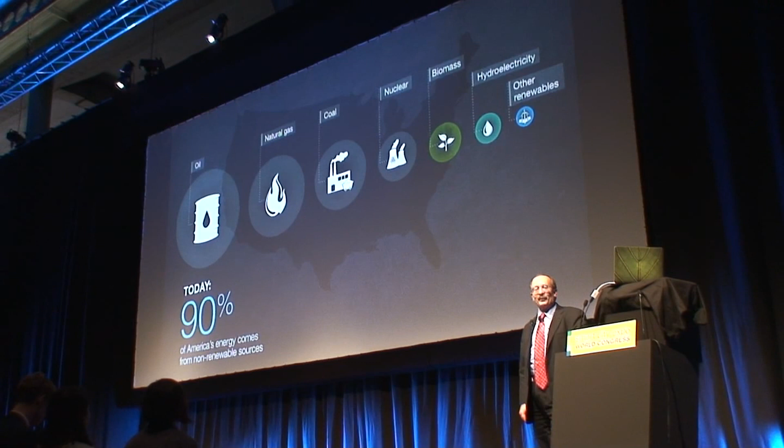4/5 of the world's energy still comes from burning each year 19 cubic kilometers of the rotted remains of primeval swamp goo. As a National Petroleum Council member, I should tell you, and it's true, that those fossil fuels have built our civilization and created our wealth and enriched the lives of billions of people. But their rising costs to our security, health, environment, economy are eroding, if not outweighing, their benefits. So we need a new fire.

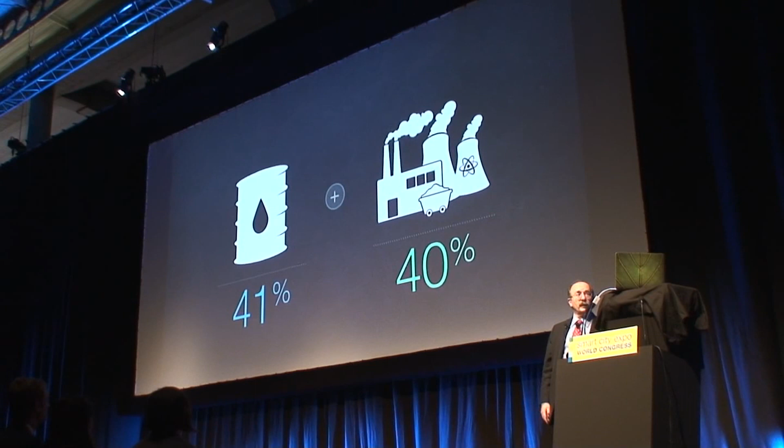And switching from the old fire to the new fire changes 2 big stories, oil and electricity, each of which puts 2/5 of the fossil carbon into the air. These are distinct stories. In my country, they're less than 1% linked, but the uses are similarly concentrated. 3/4 of U.S. oil fuels transportation, 3/4 of U.S. electricity powers buildings, the rest of both runs factories. So very efficient transport and land use and buildings and factories can save a lot of oil and coal and natural gas to displace both.

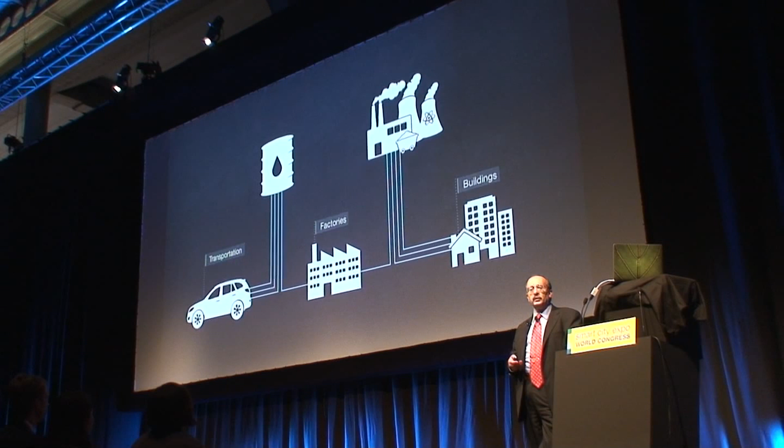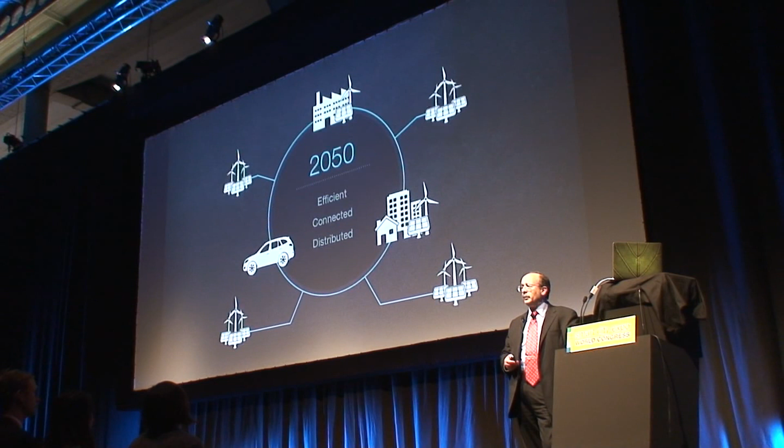But today's energy system is not only inefficient, it's also aging, dirty, insecure and disconnected, and it needs refurbishment. But by 2050, it could become efficient, connected, and distributed with elegantly frugal vehicles, buildings, and factories, all depending on a secure, modern, and resilient electricity system. So we can eliminate our addiction to oil and coal by 2050 and use 1/3 less natural gas while switching to 3-fold more efficient use and 3/4 renewable supplies.

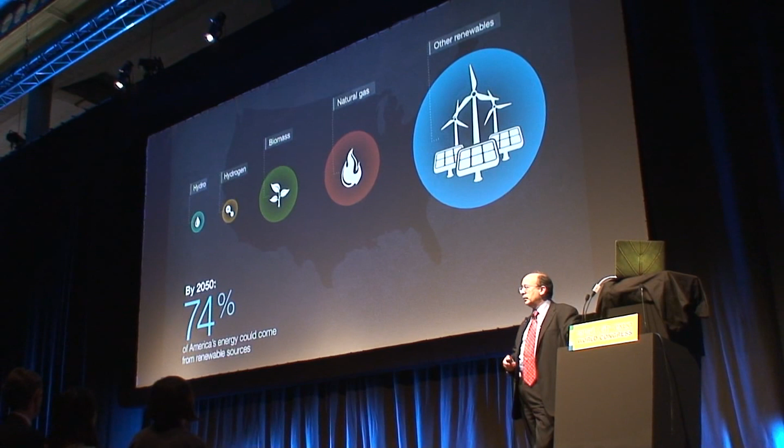That's the transition I'll describe for the United States, but I work in 50-odd countries, and I think you'll find that the U.S. solutions have considerable resonance, opportunity, adaptability to many other societies. Now, by 2050, we found that this transition in the United States could cost $5 trillion less in net present value than business as usual, counting all external or hidden costs at 0, a conservatively low estimate. And yet this cheaper energy system could support a 158% bigger economy, all without needing oil or coal, or for that matter, nuclear energy.

And this transition would need no new inventions and no acts of Congress, running around Washington gridlock, because instead it's led by business for profit. It uses our most effective institutions, private enterprise co-evolving with civil society, sped by military innovation, to go around our least effective institutions. And whether you care most about profits and jobs and competitive advantage, or about national security, or about environmental stewardship, creation care, public health, climate protection, strong communities, reinventing fire makes sense and makes money.

Now, General Eisenhower reputedly said that expanding the boundaries of a tough problem makes it soluble by encompassing more options and more synergies, including what the solution requires. So in Reinventing Fire, we integrated all 4 sectors that use energy: transport, buildings, industry, and electricity. And we integrated 4 kinds of innovation, not just the usual 2, technology and public policy, but also 2 even more powerful ones normally left out, namely design, the way we combine technologies, and strategy, new business models, new competitive strategies. And these combinations give much more than the sum of their parts, especially in creating some deeply disruptive business opportunities.

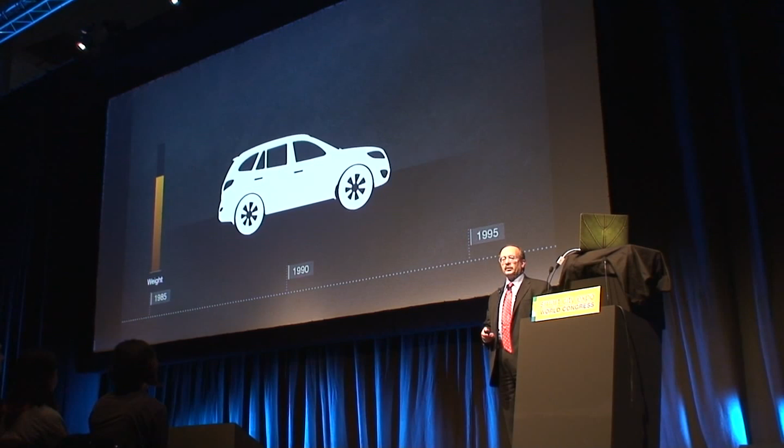But for the past quarter century, epidemic obesity has made our 2-ton steel autos gain weight twice as fast as we have. Happily, today we have ultralight, ultra-strong materials like carbon fiber composites that can make dramatic weight savings snowball and can make autos simpler and cheaper to build, as I'll explain.

Lighter, more slippery autos need less force to move them, so their engine gets smaller. Then you can afford to electrify them, because you need about 3 times fewer of the costly fuel cells or batteries. So they get smaller, lighter, and cheaper, and the price of the car converges toward today's value, while the driving cost per kilometer gets much smaller.

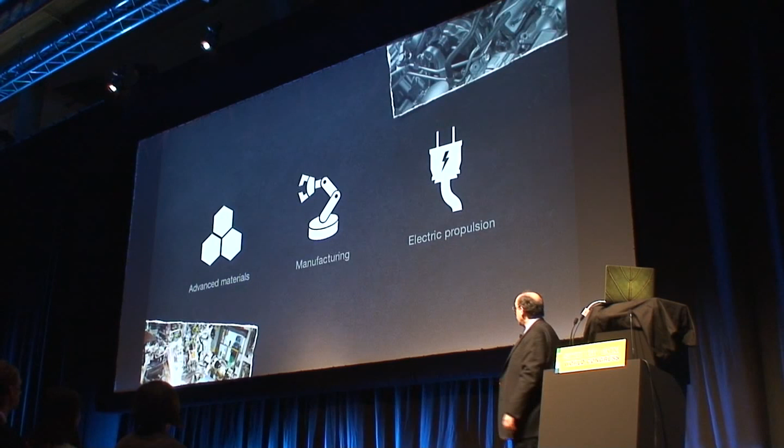That specific sequence of innovations can transform automakers from wringing tiny savings out of essentially Victorian steel stamping and engine technologies, to the steeply falling costs of 3 mutually reinforcing technologies: the ultralight materials, their manufacturing techniques, and electric propulsion.

If you are exploiting 3 steep and synergistic learning curves while your competitor is out on the flat part of one learning curve, you win. This also turns out to de-risk the auto business very substantially.

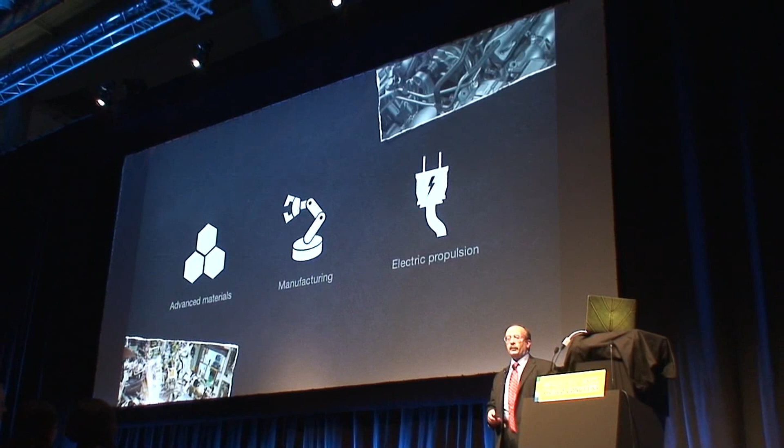Now, sales of ultralight electric autos can grow faster and their costs can drop faster with a public policy called feebates — temporarily, though, that means rebates for efficient new autos paid for by fees on inefficient ones. In its first 2 years, the biggest of 5 European feebate or bonus-malus systems tripled the speed of improving auto efficiency. That was in France.

The resulting shift to electric autos is going to be as game-changing as shifting from small refinements in typewriters to the dramatic Moore's Law-driven gains in computers. Of course, IT is now our biggest industry. Typewriter makers have vanished.

So vehicle fitness, taking the obesity out of the car, opens up a powerful new automotive competitive strategy that doubles the expected oil savings in 40 years, but also makes affordable the electrification that can save the rest of the oil.

Many different countries could lead this next automotive revolution. The formidable barriers are much more cultural than they are technological or economic, and we're helping both the automakers and the supply chain to tackle them. The current leader is Germany.

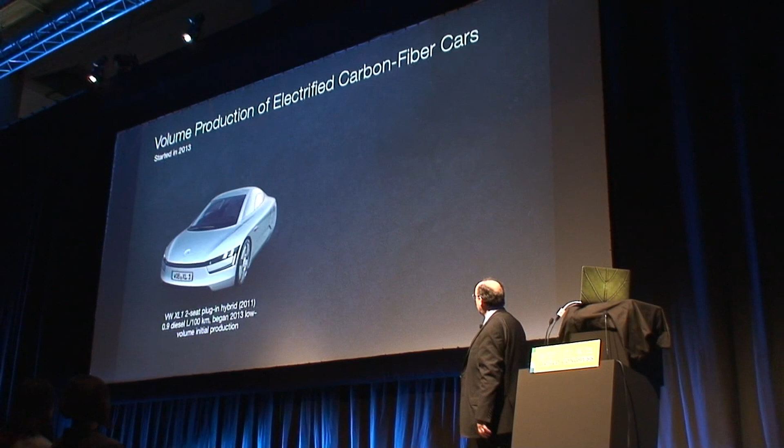This year, Volkswagen began ramping up low-volume production of this 2-seat carbon fiber plug-in hybrid, getting 0.9 diesel liters per 100 kilometers. And BMW began ramping mid-volume production of this carbon fiber battery electric car.

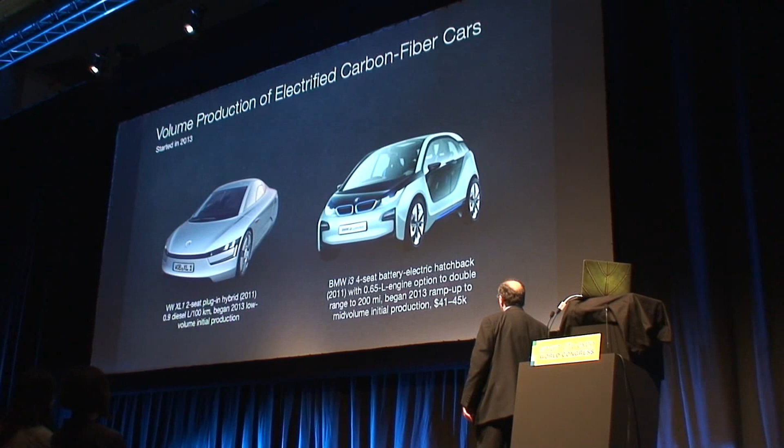They said its carbon fiber is paid for by needing fewer batteries, and their CEO said we do not intend to be a typewriter maker, because he can look across München to where Olympia used to make excellent typewriters.

Audi recently showed a carbon fiber plug-in hybrid concept vehicle rated like this one at 0.9 liters per 100 kilometers, but it's an SUV.

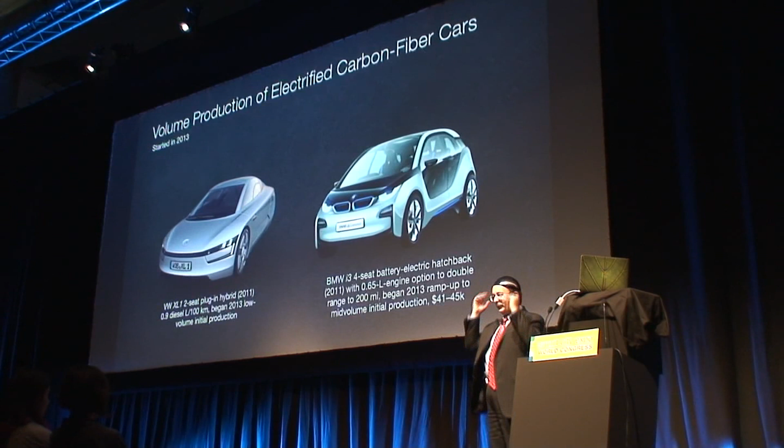Now, 7 years ago, an even faster and cheaper technology developed by one of our spin-offs made this carbon cap in less than 1 minute. And if I hit it, you can tell it's extremely strong and stiff.

Rings like a bell. So it's stronger and stiffer than steel, a third the weight, tougher than titanium. Tom Friedman, the journalist, hit it as hard as he could with a sledgehammer and couldn't even make a mark on it. So don't worry about dropping it.

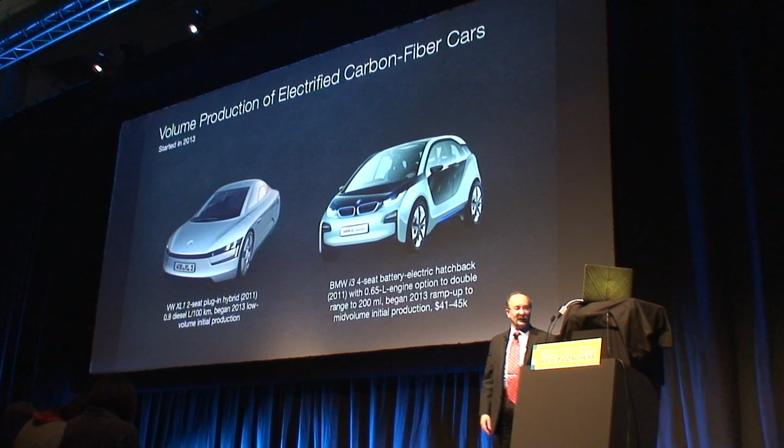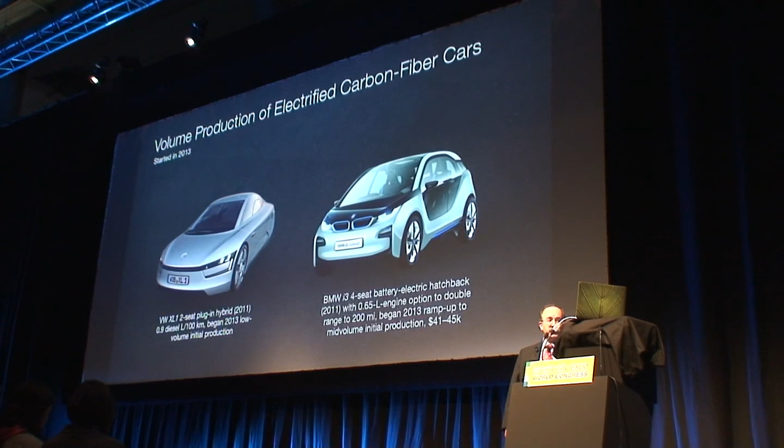I brought along another piece that was recently made that's induction welded. And it's now possible to make a 2x2 meter complex part with such techniques in 1 minute. Such techniques, which are available now in various forms from 17 firms, can scale to automotive cost and speed with essentially aerospace performance.

Adoption could save 4/5 of the capital needed for automaking and could save a lot of lives, because these materials can absorb 6 to 12 times as much crash energy as steel per kilo.

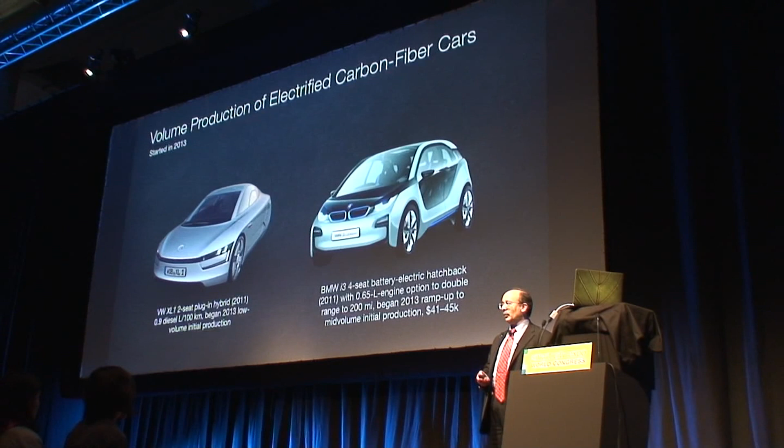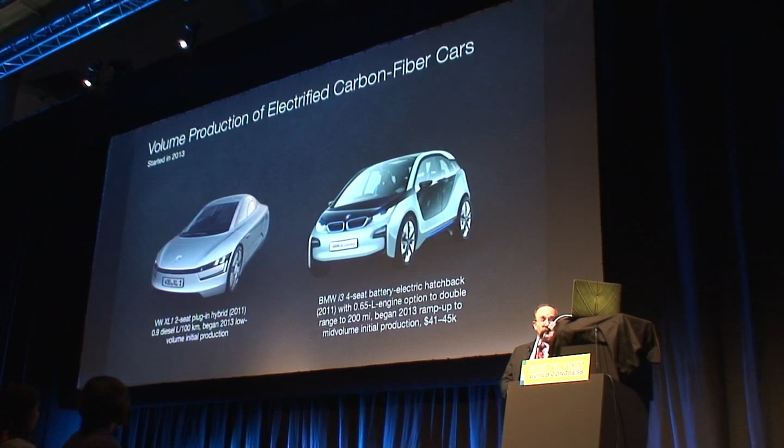They could save oil equivalent in the US alone to 1.5 Saudis or half an OPEC that we would find by drilling in a very prospective play called the Detroit Formation. There's a lot of negabarrels down there, and they cost $18 a barrel because it's just to pay for the electrification. The ultralighting is essentially free, paid for by simpler automaking and a much smaller powertrain.

And of course, the negabarrels are domestic, secure, carbon-free, and inexhaustible. The lightest announced carbon fiber family car is this plug-in hybrid concept car that Toyota showed 6 years ago. It has the interior volume of a Prius, half the fuel use, 1/3 the weight, 420 kilograms. And that, I think, is a sign of things to come.

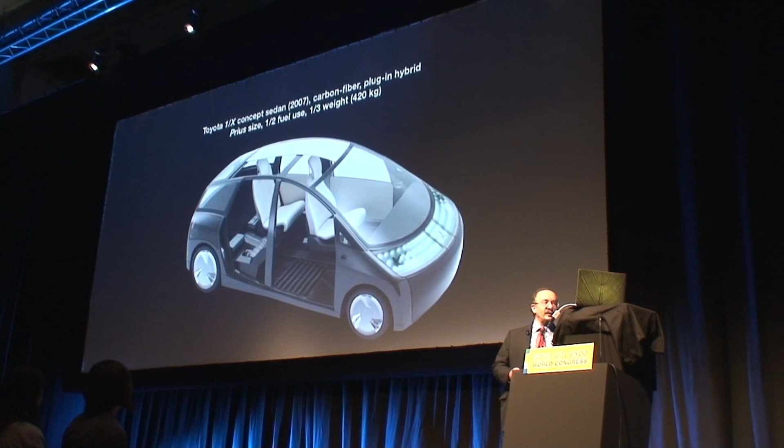Now, the same physics and the same business logic apply also to heavy vehicles. Walmart last year used 44% less fuel than in 2005 to move a case in its giant fleet of heavy trucks. And the full technological potential to improve the Class 8 trucks is a tripling of efficiency. If you combine that with the triple to quintupled efficiency airplanes being designed at places like Boeing, NASA, and MIT, then the U.S. would save nearly $1 trillion worth of fuel on the heavy vehicles.

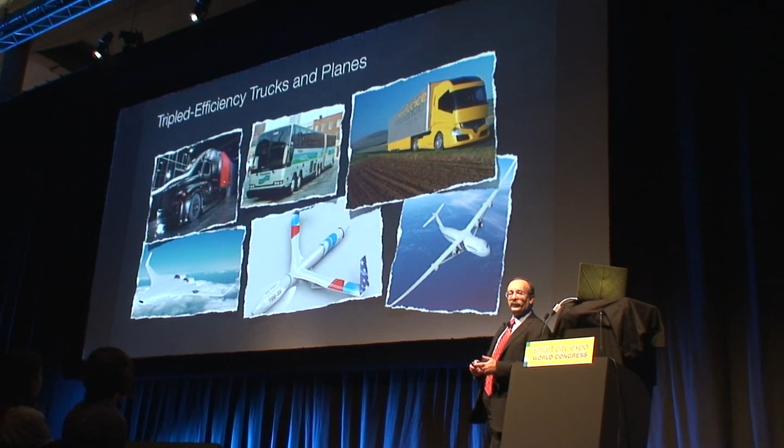And in both light and heavy vehicles, these technical revolutions in efficiency are being driven by the military revolution in efficiency. It's going to make that faster, much as military R&D already gave us the internet, the global positioning system, the jet engine industry, the microchip industry. Only this time it will be leveraging oil savings in the civilian sector, which uses over 50 times as much oil, and that will help get big oil-guzzling countries like mine off oil much faster, so that we needn't fight over the oil, and then our warfighters can have negamissions in the Persian Gulf, mission unnecessary. They really like that idea.

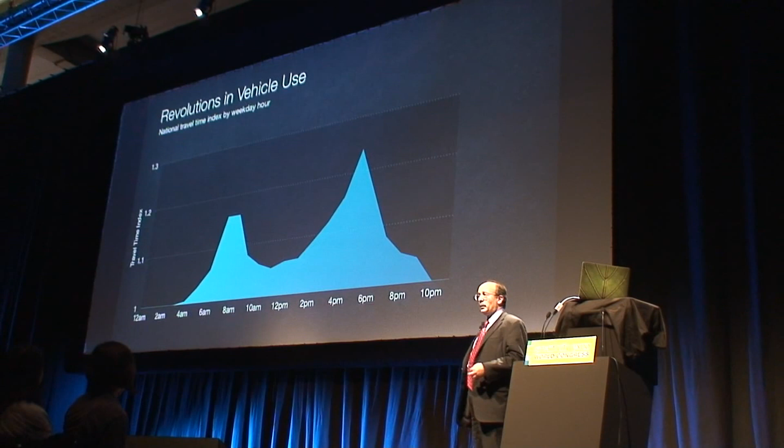Now, as we design and build vehicles better, we can also use them a lot smarter. This is a graph of U.S. traffic congestion with the morning and evening rush hours. And if that were an electricity load shape, we would be using a lot of IT-enabled pricing and smart grid and demand response to try to flatten those peaks. But by not yet doing this for road traffic, we are wasting many billions of dollars a year in idle people, idle vehicles, and idle roads.

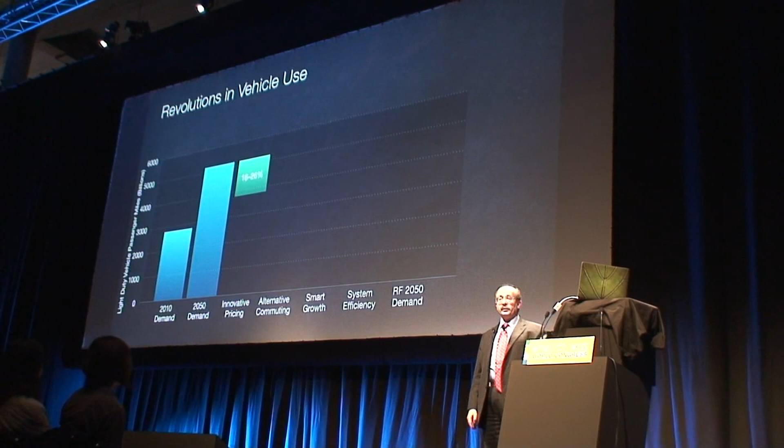But instead of just standing back and watching driving double as officially forecast, we could eliminate needless driving by combining 4 very powerful techniques. Namely, we can charge real-time driving costs per kilometer, not per liter. We can use smart IT to enhance public transport and empower car sharing, ride sharing, and smart parking. We can allow lucrative smart growth real estate models that help people be already where they want to be so they don't need to go somewhere else. That's more profitable for the developer, and we can also use IT to make traffic free flowing.

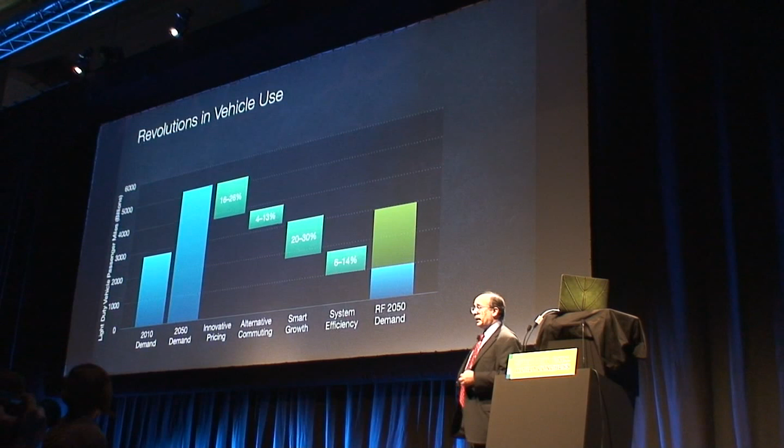So by combining those proven methods, the U.S. could get the same access and mobility, or better, with 46 to 84% less driving, saving another $0.3 trillion, plus another $0.3 trillion from smarter use of trucks. So 40 years from now, a much more mobile U.S. economy could be using no oil, and saving or displacing each barrel for $25 a barrel rather than buying it for way over $100 a barrel saves $4 trillion net present value, or if we counted just the hidden economic and military costs of U.S. oil dependence, that would be $12 trillion. And that still doesn't count any costs to health, safety, environment, climate, global stability and development, or our nation's independence and reputation.

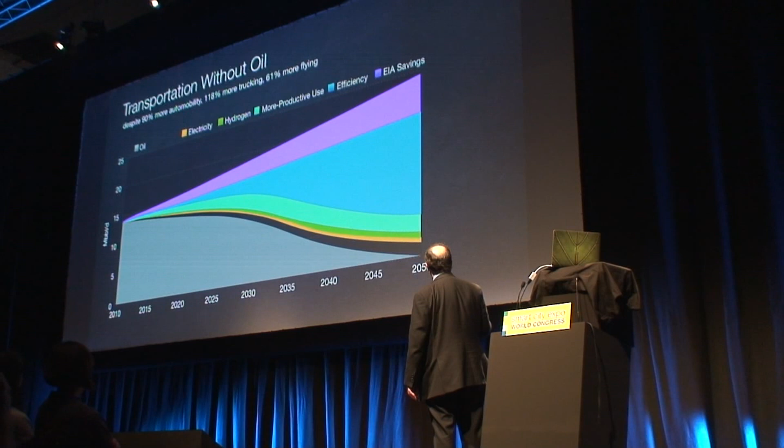So to get mobility without oil, to phase out the oil, we can first get efficient, adding to the government forecast savings, the new ones from vehicle fitness and more productive use of vehicles. And then those 1 or 2 liter per 100 kilometer autos can run on any mixture of hydrogen, electricity, and advanced biofuel. The heavy trucks and airplanes could realistically run on advanced biofuel or hydrogen, or the trucks could run on natural gas, but none of them will need oil. And the needed biofuels, if any, are such a small number they could be made 2/3 from waste and without needing any cropland or harming soil or climate.

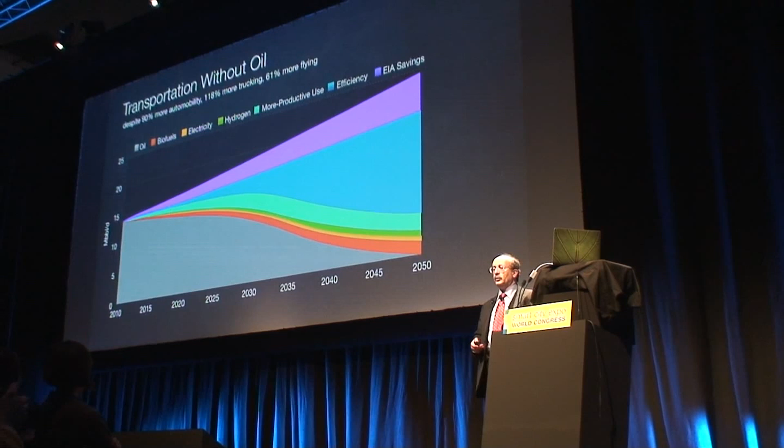So our little team speeds these oil savings by what we call institutional acupuncture. If the business logic is congested and not flowing properly, we insert little needles into selected points in partners like Ford, Walmart, and the Pentagon to get that chi, that entrepreneurial juice, flowing properly.

This long transition is well enough underway that even 4 years ago, some analysts were starting to see peak oil, not in supply, but in demand. Because as happened to whale oil in the 1850s, oil is becoming uncompetitive even at low prices before it becomes unavailable even at high prices.

But the electric autos that help that happen need not add new burdens to the electricity system. Rather, when smart autos exchange electricity and information through smart buildings with smart grids, they add to the grid flexibility and storage that help it accept varying solar and wind power. So it becomes easier to solve the auto and electricity problems together than separately.

And the electric autos also converge the oil story with our second big story: saving electricity and then making it differently.

These twin revolutions in electricity promise more numerous, diverse, and profound disruptions than in any other sector, because we've got 21st century technology and speed colliding head-on with 20th and even 19th century institutions, rules, and cultures.

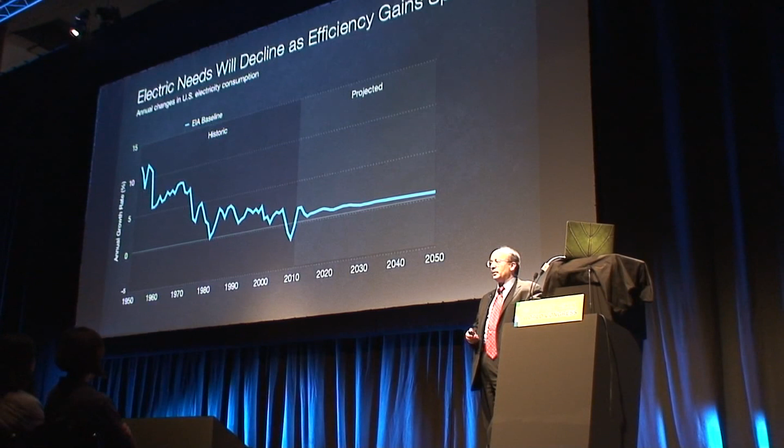Now, changing how we make electricity gets easier if we need less of it. Today, most of it is wasted, and the technologies for saving it keep improving faster than we can install them. So the unbought reserves of negawatts, saved watts, keep getting bigger and cheaper.

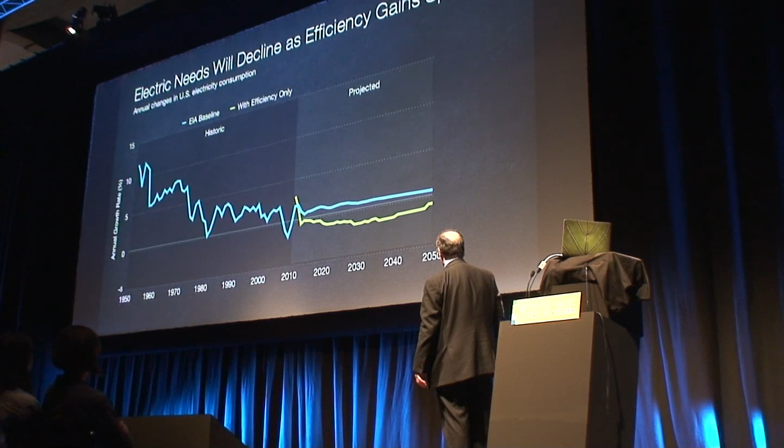But as buildings and industry start to catch up and get efficient faster than they grow, the demand for, say, U.S. electricity, instead of growing 1% a year as officially forecast, could shrink 1% a year, even after allowing for the extra use from those efficient electric cars.

And something like this, only more so, seems to be already happening, because last year alone in the United States, the weather-adjusted electricity used to make $1 of real GDP fell by 3.4% in one year. Unprecedented. But we can keep demand dropping by reasonably accelerating existing trends.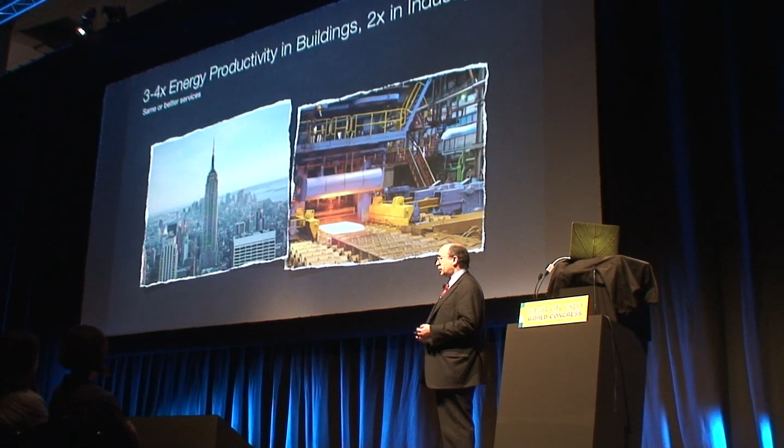Over the next 40 years, U.S. buildings, which I'll remind you use three-quarters of our electricity, could triple or quadruple their energy productivity, saving $1.4 trillion net present value with a 33% internal rate of return. The savings are worth 4 times their costs. And industry can also accelerate and double its energy productivity with a 21% internal rate of return.

So to do those things by 2050, we would just need, by 2030, to ramp up the national average levels of efficiency adoption to what our Pacific Northwest states already achieved 8 years ago.

There is a disruptive innovation we call integrative design that can do even better, because it often makes very large energy savings cost less than small or no savings, turning diminishing returns into expanding returns.

That's how our retrofit 3 years ago is saving two-fifths of the energy in the Empire State Building. We started off by remanufacturing all 6,500 windows on a temporary 5th floor window factory into super windows that are 3 times more insulating and let light come through but block heat.

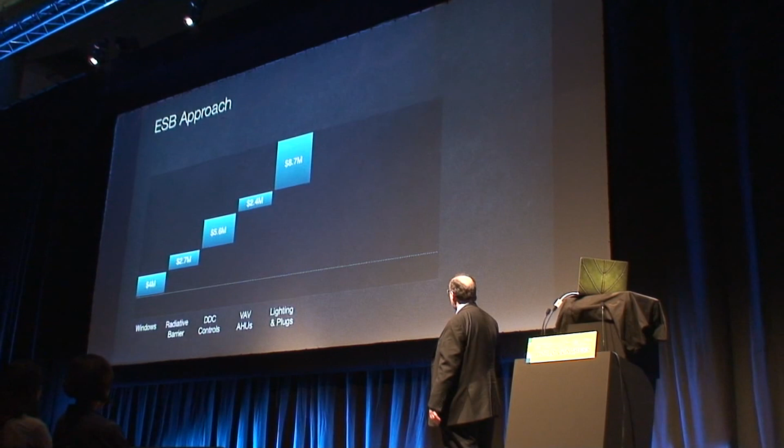Those, plus other improvements, reduced the maximum cooling load by one-third, and that made us able to save enough capital to pay for most of these improvements by renovating smaller chillers rather than adding bigger chillers. That capital saving reduced the payback time to just 3 years.

By the way, a major energy service company had also offered a 3-year payback, but their savings would be 6 times smaller, because they did disintegrated design, optimizing components separately, while we optimized the whole building as a system.

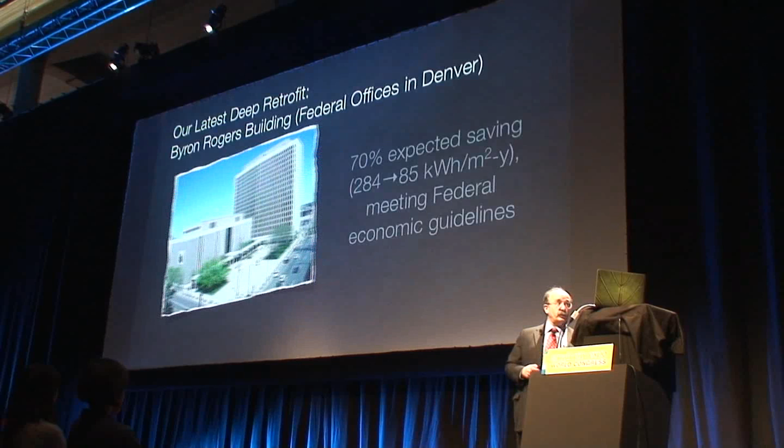We've just finished the cost-effective retrofit of a difficult 48-year-old federal office building, which is expected to cut energy use by 70%, making it probably more efficient than the most efficient new U.S. office building. That's how fast the state-of-the-art is moving.

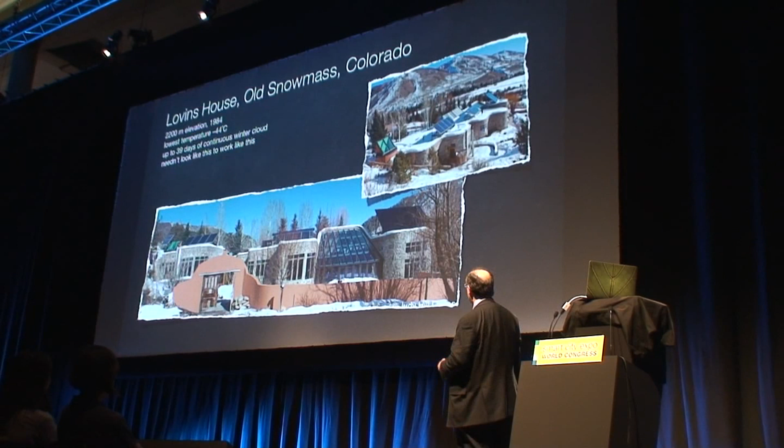Now let's look at a different sort of building. My wife Judy and I live in this house at 2,200 meters elevation near Aspen, Colorado, high in the Rocky Mountains, where the lowest temperature could be as low as minus 44 Celsius. And we've had up to 39 days of continuous cloud in midwinter.

This is actually an archetype that helped inspire the 30,000 or more European passive buildings, which, like ours, have and need no heating system, but have roughly normal construction cost. And they can look like whatever you want. They don't need to look like this to work like this.

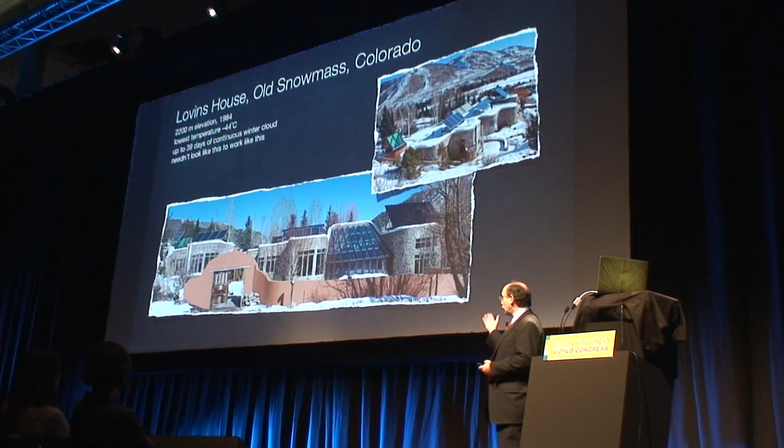Now, let's come into this central atrium, under the special glass which insulates like 14 sheets of glass. This is what the middle of the house looked like in a February snowstorm two years ago. You can see two of the five banana crops that were then ripening with no heating system. In fact, here's our new banana crop number 48, and here's numbers 46 and 47 - passive solar banana crops. These actually weighed 30 kilos and harvested themselves in March or so by pulling down the tree.

Now, when I moved into this house in 1984, it was saving about 99% of the usual space and water heating energy, about 90% of the household electricity, and about half the water. And it was all paying for itself in the first 10 months.

That was using 1983 technology. Well, today's is a lot better, so we've now retrofitted it and we're measuring about 300 data streams to see how much better. The trouble is that the measuring equipment seems to be using more electricity than the lights and appliances we're measuring.

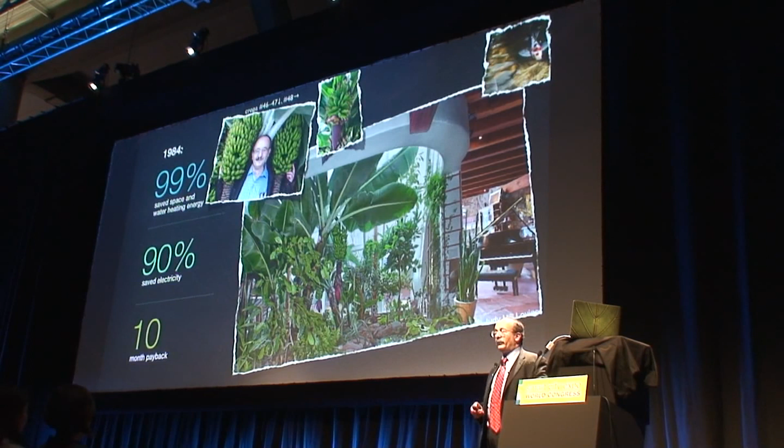A similar design has been used to eliminate air conditioning up to 46 Celsius - not a limit - with better comfort and lower construction cost. It's been used in steamy Bangkok to save about 90% of the air conditioning energy with normal construction cost and lower and better comfort. So probably almost everyone in the world lives in a climate somewhere between Bangkok and this place in Colorado. But wherever you are, the key is to get multiple benefits from single expenditures.

So this white arch holding up the middle of our house has 12 different functions, but only one cost.

Integrative design can also increase the $500 billion of conventional energy savings in U.S. industry. Dow has already captured $9 billion of energy savings on a $1 billion investment. But there's much more to do.

For example, three-fifths of the world's electricity runs motors, half of that runs pumps and fans, and we can make motors, pumps, and fans much better. But first we should capture bigger and cheaper savings that are normally ignored and are not yet in any of the engineering textbooks. For example, the biggest user of motor power is pumping - moving liquids through pipes.

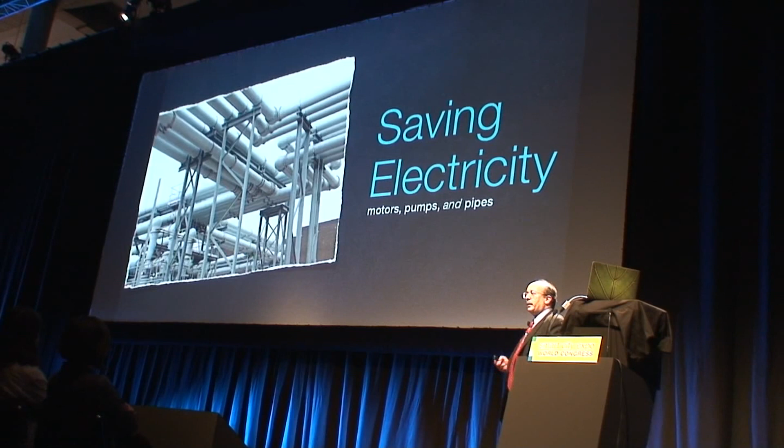But a standard industrial pumping loop was redesigned by a Dutch colleague to use at least 86% less pumping energy, not by improving the pumps and motors and controls, but just by replacing long, thin, crooked pipes with fat, short, straight pipes. And in the process, the pumping equipment gets smaller and the total capital cost goes down.

Actually, we did something like this in some new piping in our own house and saved 99% or so of the pumping energy at lower cost. So this is not new technology. This is just rearranging our metal furniture as designers, rediscovering Victorian engineering.

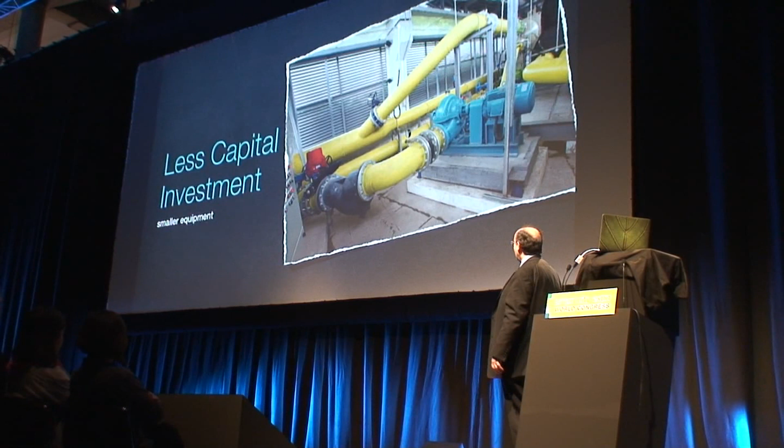And what does this mean for the electricity that's three-fifths used in motors? Well, if you put 100 units of, say, coal into the power plant, there are so many compounding losses that only one-tenth of that energy comes out the pipe as flow.

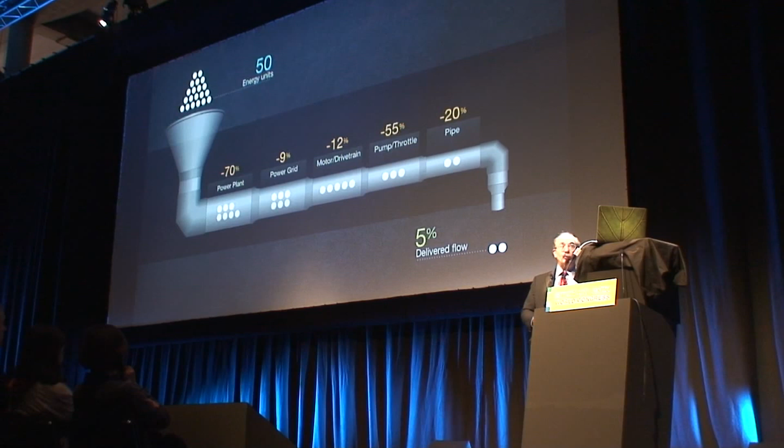But now we can turn those compounding losses around backwards from right to left, and they become compounding savings. When we save one unit of flow or friction in the pipe, it compounds back again to save 10 units of fuel and cost and pollution back at the power station, as well as what Hunter Lovins calls global weirding, and at the same time the components, as you go upstream, get smaller and cheaper.

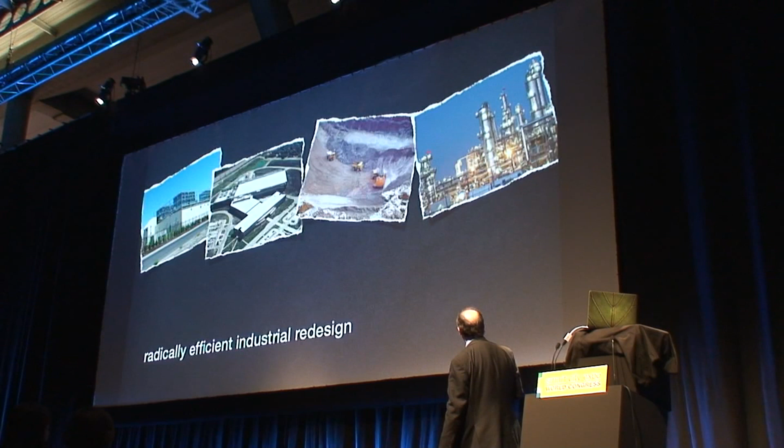Now, our team has lately found such snowballing energy savings in over $40 million worth of diverse industrial redesigns, from a Hewlett-Packard data center and Texas Instruments chip fab to Rio Tinto and Anglo-American mines and Shell hydrocarbon facilities and many others. Typically our retrofit designs can save about 30 to 60% of the energy with a 2 or 3 year payback, and our new facility designs save a bit more, say 40 to 90%, but almost always at lower capital cost.

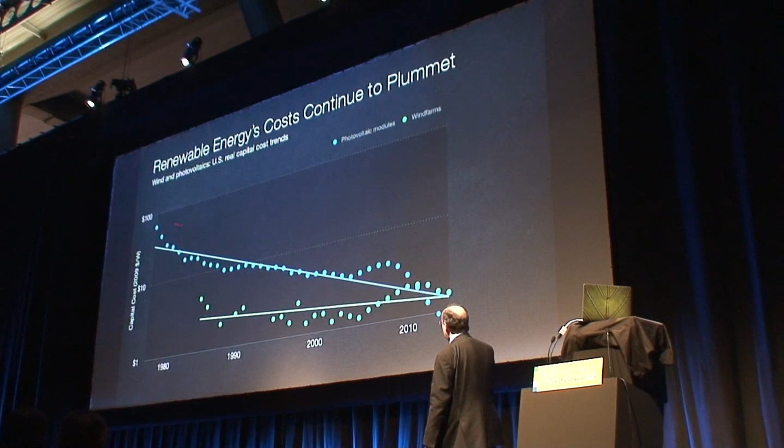Of course, needing less electricity would ease and speed the shift to new sources of electricity, especially modern renewables. China is leading their explosive growth and their plummeting costs, shown here on a logarithmic scale for solar photovoltaic modules, which have fallen off the bottom of the chart, and for wind farms.

And these technologies, when put in good sites, now actually outcompete even the supposedly cheap frack gas in the United States. So they're marketplace winners, and that's even though they're generally subsidized less than non-renewables are.

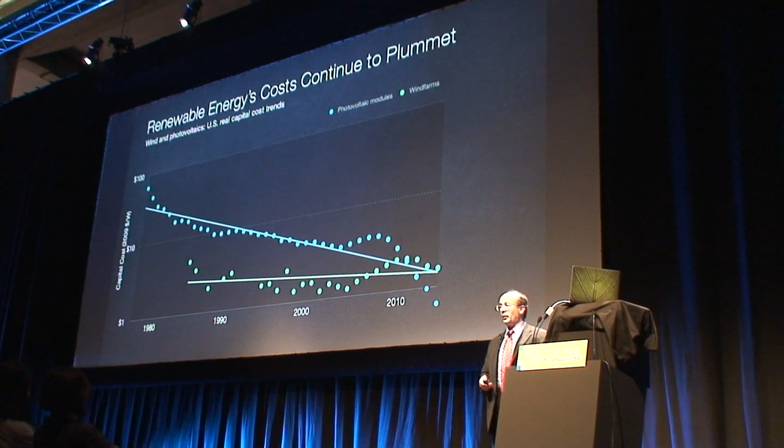In Germany, the installed solar power systems cost only half what they cost in the United States. We all buy the same equipment, but the German installers are much more efficient.

And therefore, today, even at twice the German price, remarkably, in at least 20 of the United States, entrepreneurs can come to your house and put solar power on your roof with no down payment and beat your electric bill. Soon the no down payment, no money down, will turn into cash back as the costs continue to fall.

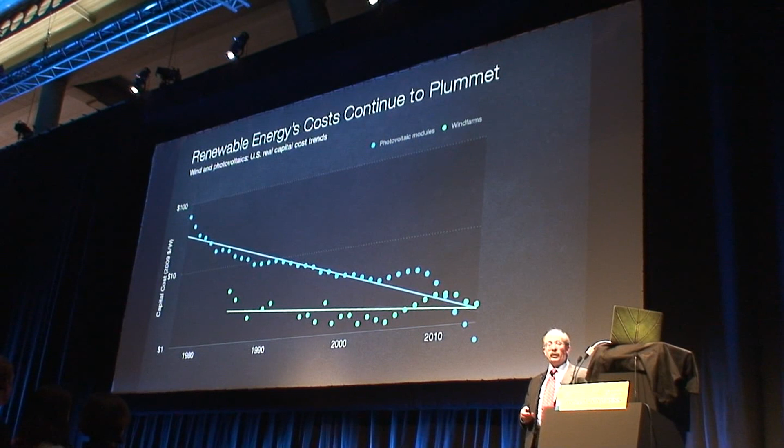And such unregulated products could ultimately add up to a virtual utility that could bypass the electric company, just as wireless phones bypass the wireline telephone companies. This gives electricity executives nightmares and venture capitalists sweet dreams.

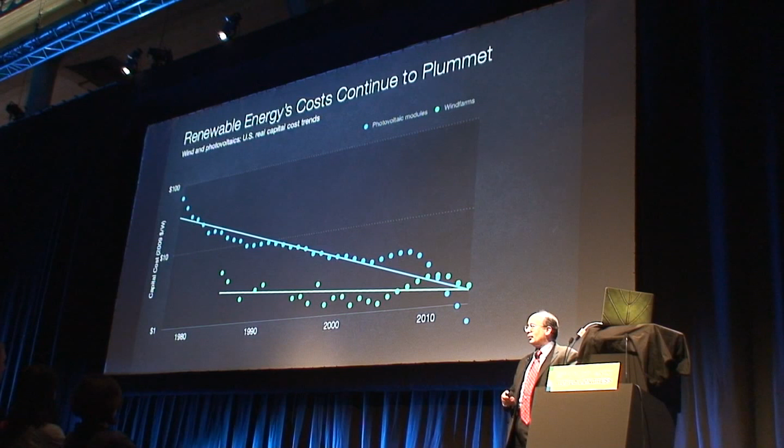Or the incumbent electricity providers could turn the insurgency into a major business opportunity, and we're working with both sides to do that. In fact, our institute has convened an E-Lab, or Electricity Innovation Lab, with 40-odd industry leaders to figure out the new business and revenue and regulatory models, grid integration, grid security, all the key elements of the next electricity industry.

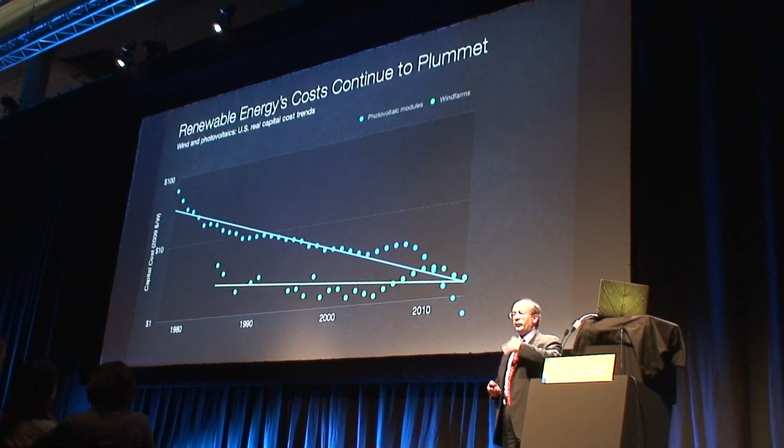For example, we've helped a little Colorado utility devise a bidirectional value tariff where the utility and the customers pay each other the fair value of the services they exchange, thus solving the unscalability of net metering.

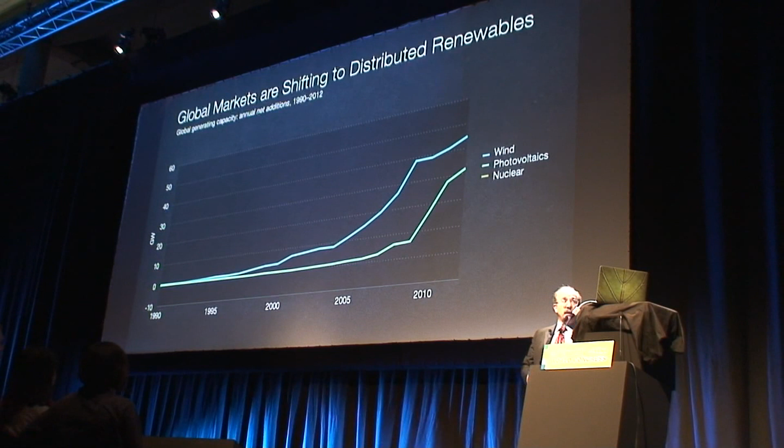Now here's the big picture. Worldwide, starting in 2008, half the world's added electric capacity each year has been renewable. And this graph shows the amount of wind and photovoltaic capacity added each year. Probably this year solar will cross over wind.

And these are very large numbers because electricity production has become a scalable, mass-produced, manufactured product, much more like microchips and computers than like building cathedrals.

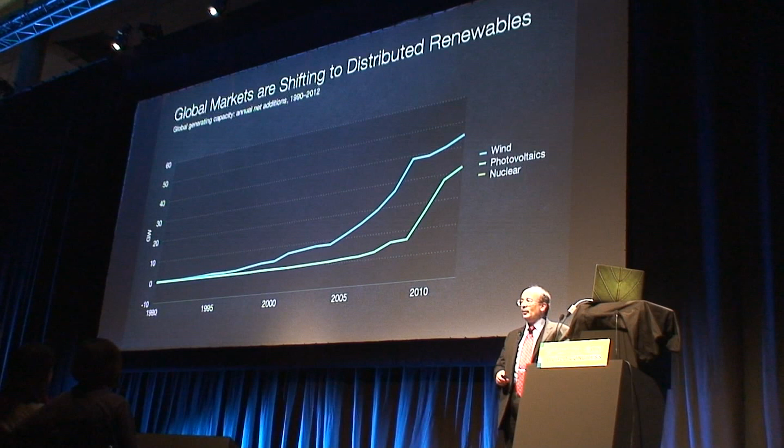We used to think you had to take 10 years and billions of dollars to build a power station. But now in those 10 years, you can build each year a photovoltaic factory, which each year thereafter will produce enough solar cells that each year that one factory's production for 1 year worth of solar cells will produce as much electricity as your big power plant would have produced.

So that's why solar cells are scaling faster than cell phones. The capacity to make them is now about 75 billion watts a year, twice the installation rate, although it's going to catch up quickly thanks to China.

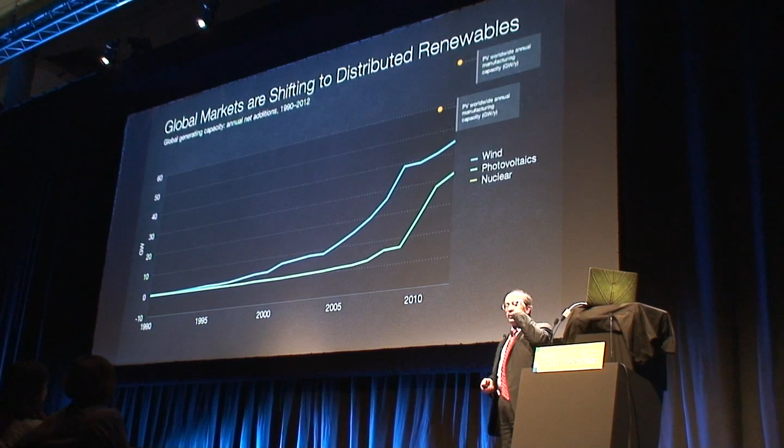And worldwide, in each of the past 2 years, these modern renewables, not counting big hydro, have got $250 billion of private investment and added over 80 billion watts of capacity. They've already surpassed, 2 years ago, the total installed capacity of nuclear power in the world. Its dwindling annual net additions actually went negative before Fukushima.

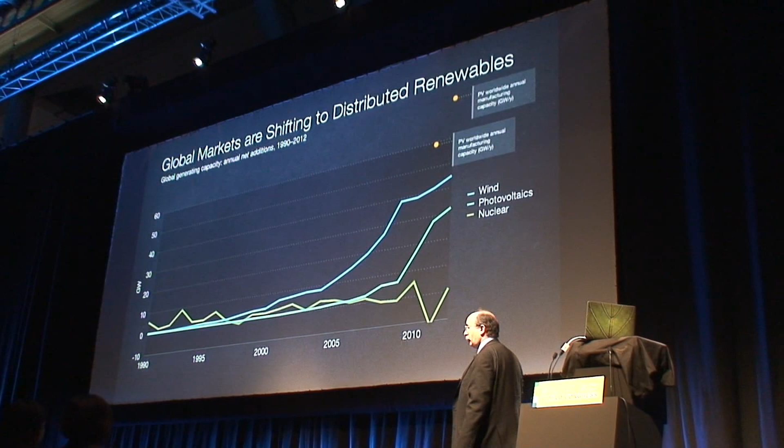And worldwide, the orders for nuclear and coal plants are dwindling because they have no business case. They have too much cost and too much risk to attract investors. And indeed, the U.S. has just abandoned 5 operating and 9 planned nuclear units so far this year because their operating cost cannot compete anymore with the wholesale power price driven down by renewables.

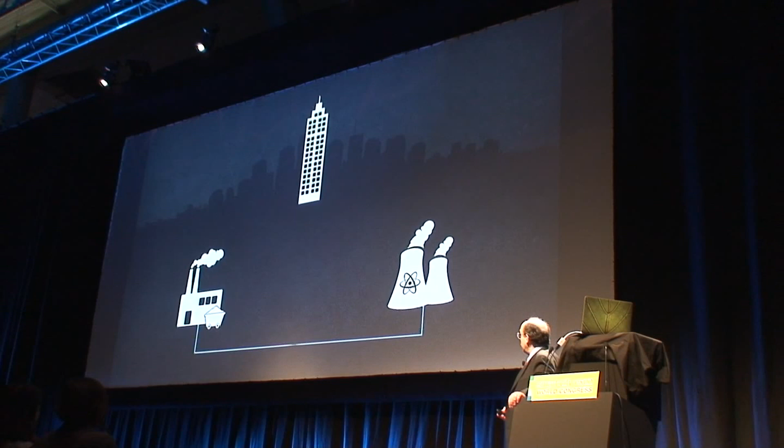Now, we are told that only giant coal and nuclear plants can keep the lights on because they are 24/7, whereas photovoltaic and wind power are variable and thus supposedly unreliable. But both parts of that statement are incorrect.

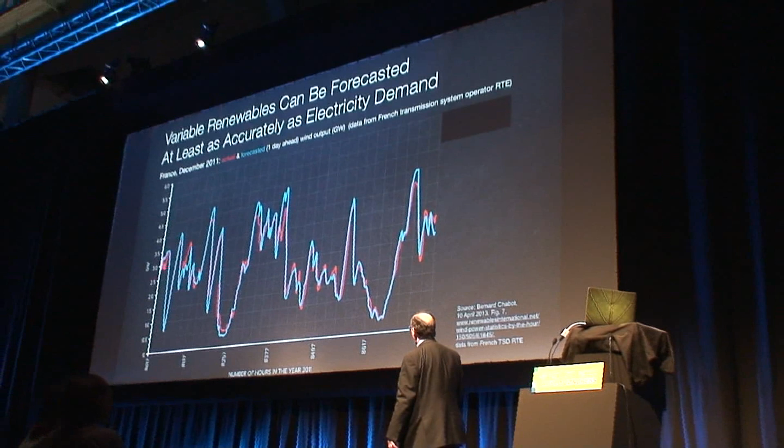This graph shows for a stormy winter month in France, that nation's output of wind power in red, and the blue curve is the forecast of the output 1 day ahead. I'll bet we wish we could forecast demand that well.

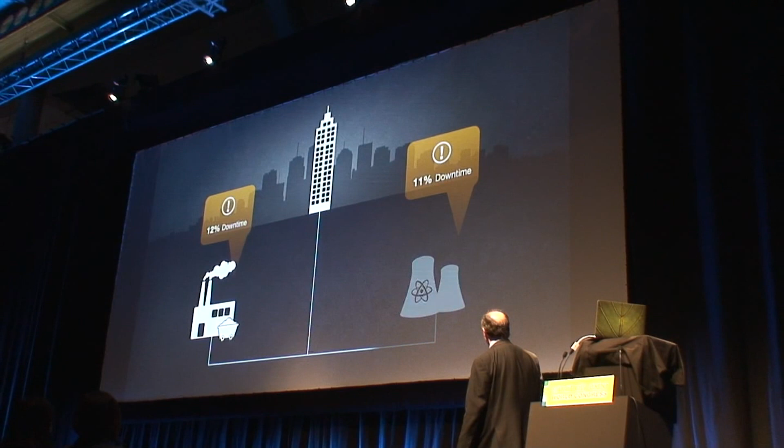Also, no generator is 24/7. They all break. And when a giant unit fails, as they do maybe an eighth of the time, you suddenly lose 1,000 megawatts in milliseconds, often for weeks or months and often without warning. That's why we've always designed the grid to back up failed plants with working plants, to cope with this intermittency of the big thermal plants.

And in exactly the same way, the grid can manage the forecastable variations in photovoltaic and wind power. That is, you diversify the portfolio of these variable resources by type and location, you forecast them, you integrate them with all the other renewables, which are dispatchable, that means you can have them whenever you want. You integrate them with demand response, you integrate them with distributed storage, and that's enough without bulk storage.

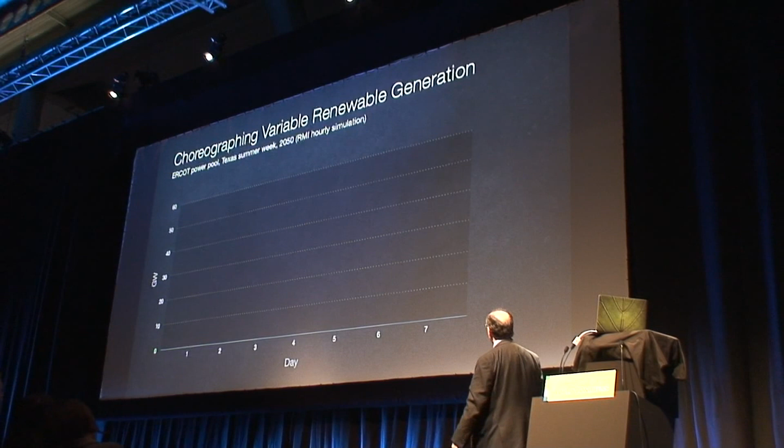Let me illustrate this with a rather difficult case for the power pool that serves the state of Texas and is isolated from the rest of the United States. In 2050, you would expect during a summer week to have a load shape like this, or less and less peaky if you use the electricity in a way that saves money.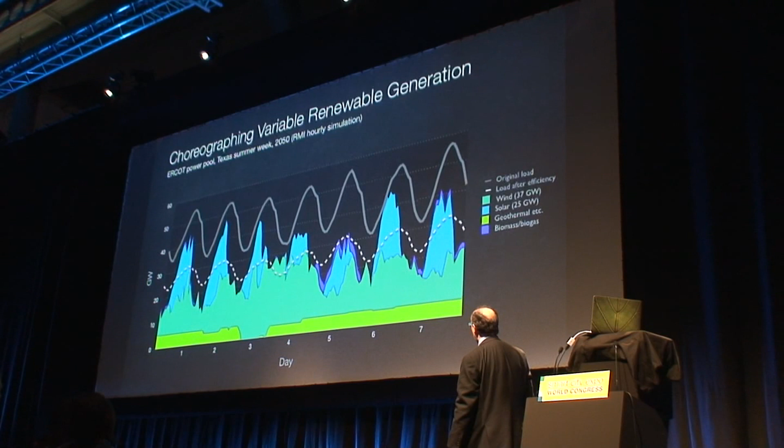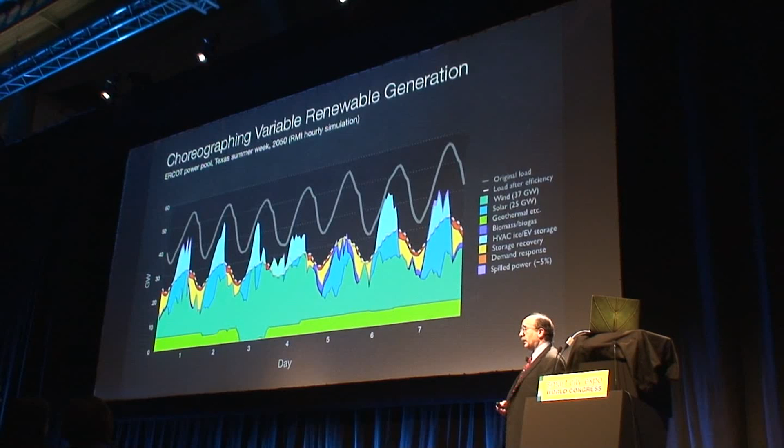So now we're 100% renewable, but you can see it doesn't match the load shape very well. But now we can take the surpluses and put them into two kinds of distributed storage, both fully deployed, namely ice storage air conditioning and smart charging of electric vehicles. Then we can recover that distributed storage when we want it and fill in the last bits with unobtrusively flexible demand, and now we have reliable power supply every hour of the year with no bulk storage and with only 5% of the renewable generation left over, so the economics should be very good.

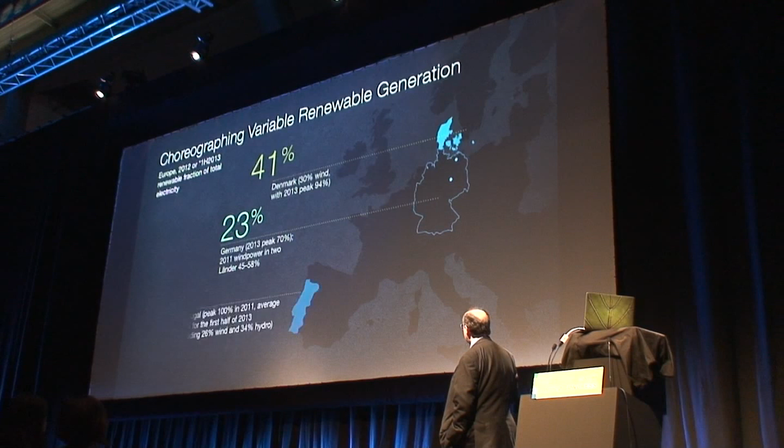Now, some utilities already are doing this. It's not just theory. They're doing this choreography of variable renewables. Last year, Germany had 23% renewable electricity and Denmark 41%, and they had the most reliable power in Europe, about 10 times the reliability of the United States electric system. The first half of this year, Spain has been 48% renewable electricity, and Portugal a remarkable 70%, up from 17% in just 8 years.

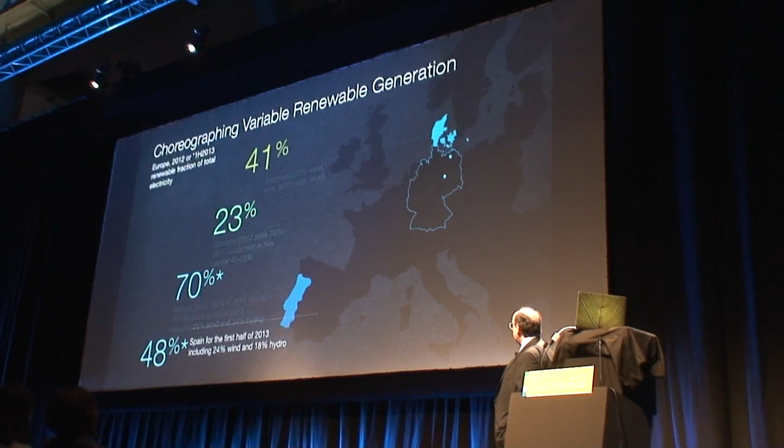Now the European vision of all renewable electricity is starting to look realistic and has been adopted or achieved as a goal in at least one sector, sometimes in all, by 8 countries, 42 cities, 49 regions, 8 utilities, 21 institutions. A sixth of Germans already live in communities or regions that expect to have all renewable electricity or that already do.

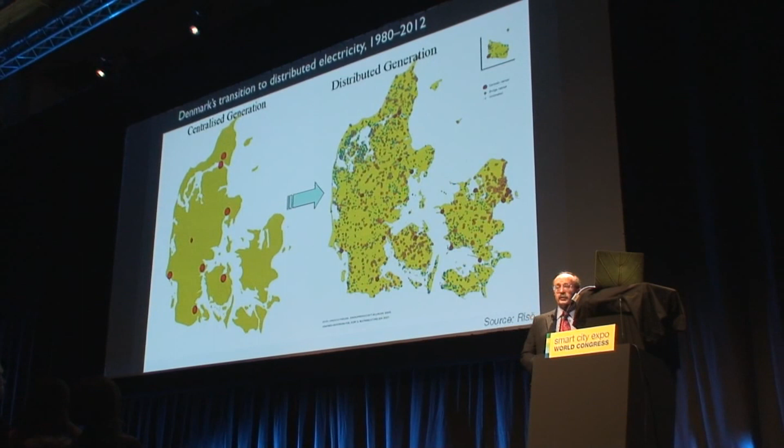Now, Denmark illustrates another important part of this story. Over 30 years, they've gone from a few centralized coal plants to a constellation of wind power in blue, 86% owned by the farmers, just as 2/3 of German renewables are owned by citizens and communities. And the rest of the Danish capacity is combined heat and power running on agricultural waste in general. And Denmark's conservative government is planning and on track to achieve wholly renewable energy, not just electricity, but all kinds, by 2050 at essentially no extra cost. Denmark is also reorganizing its grid into microgrids, a cellular architecture that can make cascading blackouts impossible.

Now, in America, we have this aging, dirty, and insecure electricity system that we must replace by 2050. And whatever we replace it with will cost about the same, about $6 trillion net present value. Whether we buy more of what we now have, or new nuclear and so-called clean coal, or centralized renewables, or more distributed renewables, they all cost about the same, but they differ profoundly in their risks around security, technology, finance, fuel, water, climate, and health. So this is a risk management play.

For example, our over-centralized grid is vulnerable to cascading and potentially economy-shattering blackouts caused by operational problems, bad space weather, bad earth weather, earthquakes, physical attack, cyber attack. But this blackout risk disappears and all the other risks are best managed with distributed renewables reorganized into microgrids that normally exchange power freely but can stand alone at need, so they can disconnect fractally, reconnect seamlessly. Our house works this way. The lights stay on whether the grid is working or not.

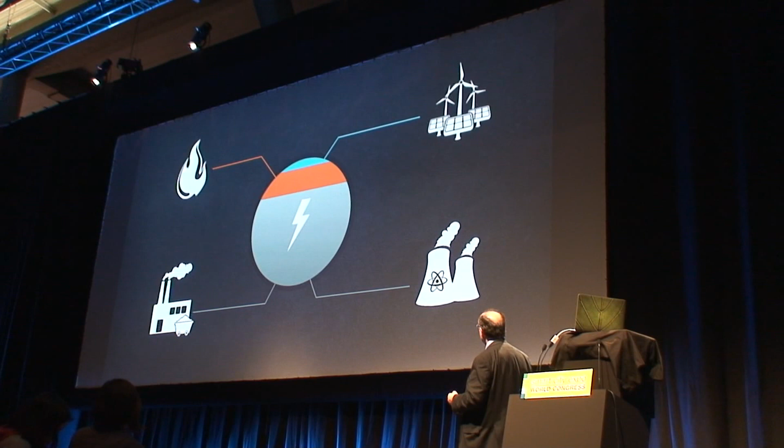Especially when we reward those companies, as we do throughout Europe and in 35 of the United States, for selling us more electricity. But where we've changed the rules in 15 states to reward the utilities for cutting our bills, not for selling us more electricity, the investment goes the other way up.

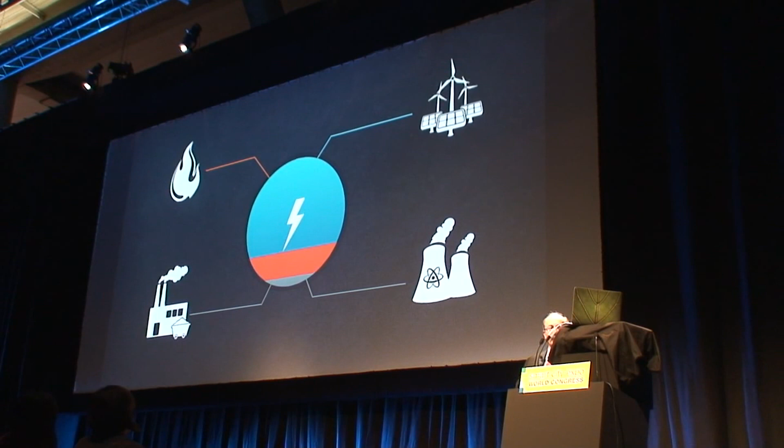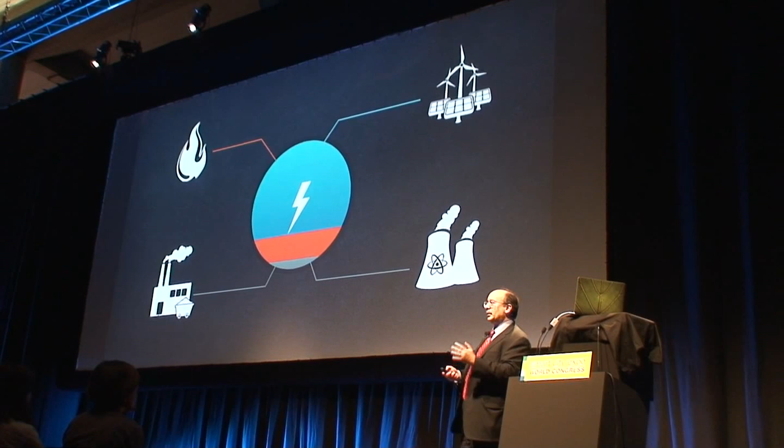It shifts massively towards efficiency, renewables, combined heat and power, distributed storage, smart grids, ways to blend them all together reliably. And especially this is true in the 30 or so United States where all ways to save electricity or to use it at more convenient times bid into the same auctions as electricity supply. And in our biggest power pool, there was a recent auction where the demand side options got 94% of the winning bids. So our energy future is not fate but choice, and that choice is very flexible.

In 1975, in my country, government and industry all insisted that the energy needed to make $1 of gross domestic product could never go down. So it was considered heretical when I said it could actually go down threefold. How did we do? Well, it's gone down by over half so far. And today, with much better technologies costing 3 times less for efficiency, and with integrated design and better financing and marketing and delivery channels, we can see very clearly how to save 2/3 of what's left at even lower cost.

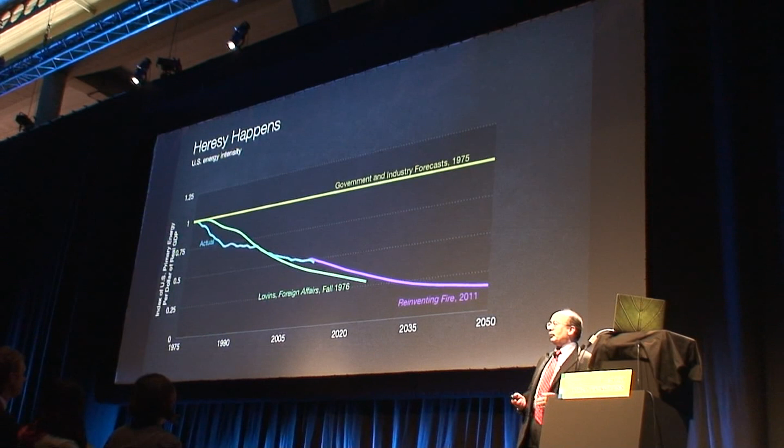So to solve the energy problem, we just needed to enlarge it and integrate it. The results may seem astonishing. They even surprised us a bit. But, you know, as Marshall McLuhan said, only puny secrets, small, weak secrets need protection. Big discoveries, you say, are protected by public incredulity.

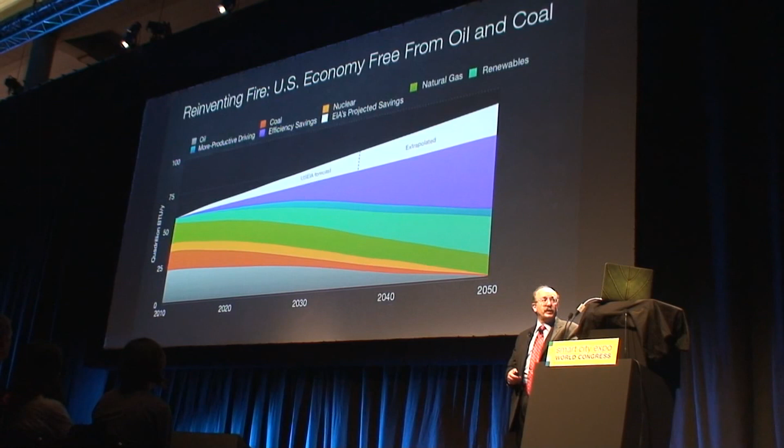So now combine the electricity and oil revolutions, and you have the really big story, reinventing fire, where business enabled and sped by smart policies and mindful markets can lead a country like the United States, and perhaps your country, completely off oil and coal by 2050, saving trillions of dollars, growing the economy 2.6-fold, and by eliminating the oil and coal, cutting fossil carbon emissions by 82 to 86%.

Now, if you like any one or more of those outcomes, you could support this transition without having to like every outcome and without having to agree about which outcome is most important. So focusing on outcomes, not motives, can turn gridlock and conflict into a unifying solution to our common energy challenge, and can also provide the most effective solutions to the big global problems that put at risk every country's security and prosperity. At our nonprofit Rocky Mountain Institute, we're helping smart companies to get unstuck and speed this journey through a variety of sectoral initiatives and projects.

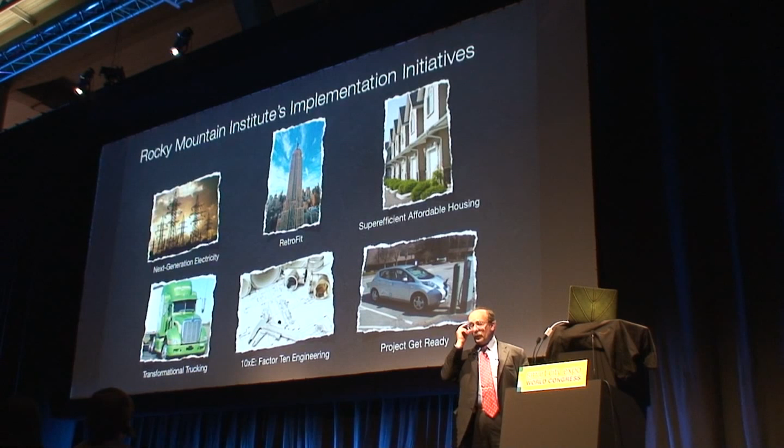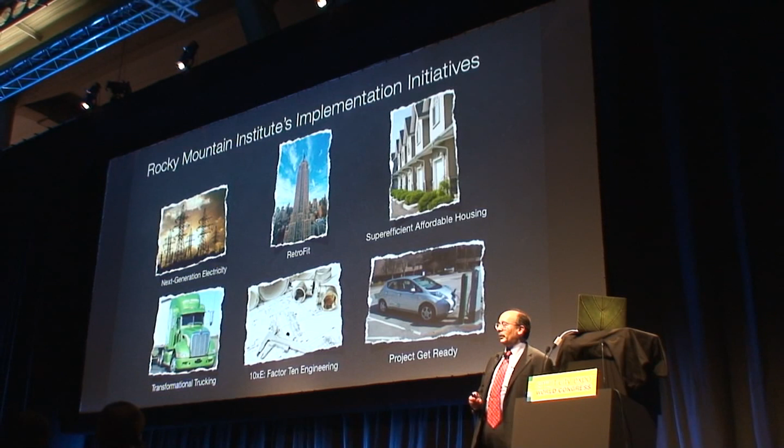Of course, there is still a lot of old thinking around too, on both sides of the Atlantic and Pacific. As the former oilman Maurice Strong said, not all the fossils are in the fuel. But as Ed Woolard said when he led DuPont, he was chairman, firms hampered by old thinking won't be a problem. Because in the long run, he said, they simply won't be around.

What I've described here is not just a once-in-a-civilization business opportunity. It's one of the greatest transformations in the whole history of our species, because we humans are inventing a new fire, not dug from below, but flowing from above. I've even heard theologians talk about energy from hell and energy from heaven. And the new fire is quite different. It is not scarce but bountiful, not local but everywhere, not transient but permanent, not costly but free.

And except for the transitional tail of natural gas and a little biofuel grown in ways that sustain and endure, this new fire is flameless. And efficiently used, it really could make energy do our work without working our undoing. Every nation, firm, city, community, citizen owns a piece of that enormous prize. And our book, Reinventing Fire, details how to capture that opportunity.

And now Rocky Mountain Institute has partnered with 3 leading organizations that are in or closely collaborating with the central government of China to bring this thinking into China's strategic planning process and to learn from China's remarkable experience. So with the conversation begun at reinventingfire.com, let me invite each of you to engage with us, with each other, with everyone around you, to help make the world healthier, richer, fairer, cooler, and safer by together reinventing fire.